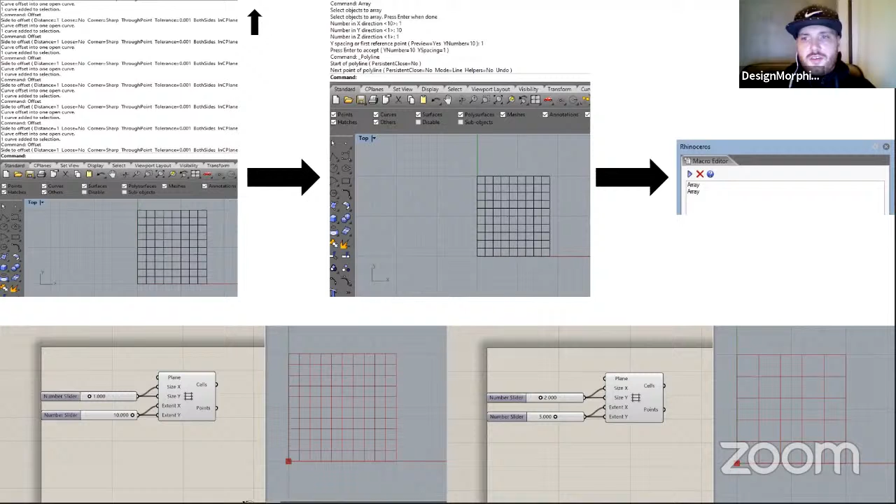Taking that onto the next level of tool building, where you're scripting and looping, you're taking those ideas, defining a square, drawing a line in U, offsetting it in V, repeating it in V, and then the same thing in the other direction, and then creating closed cells. If you can take that process, you can run it in a loop, and then you have your tool there, and you don't ever have to think about those steps again.

It's there, and you can use it. And the nice thing is when you're doing this is that it's also more flexible, so you can use this now. You can not just make a grid, but you can make a grid on a free-form surface, on whatever. So it also makes the tool, I think, more usable.

And if you take that to the extreme with something like Finch 3D, it's the same kind of idea, it's just a lot more input and variables. But if you break it down, it's really something like an extreme version of grids. So you're just creating boundaries, and the system is trying to figure out how that works, how that looks, how that lays out, what kind of space that makes, based on rules and standards and parameters.

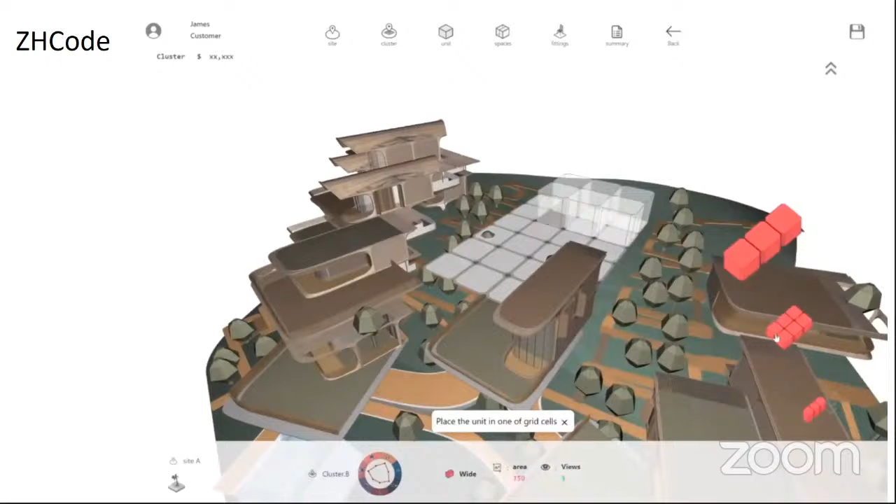And this is really important because clients, they don't necessarily understand things like building codes and required hallway widths and bathroom sizes. So it's kind of like they don't need to think about those things. They just need to know what they want. And then the system that you've developed or designed should figure that out for them. So you can get people involved in your process that don't even necessarily understand the process behind, because they don't necessarily need to understand that process.

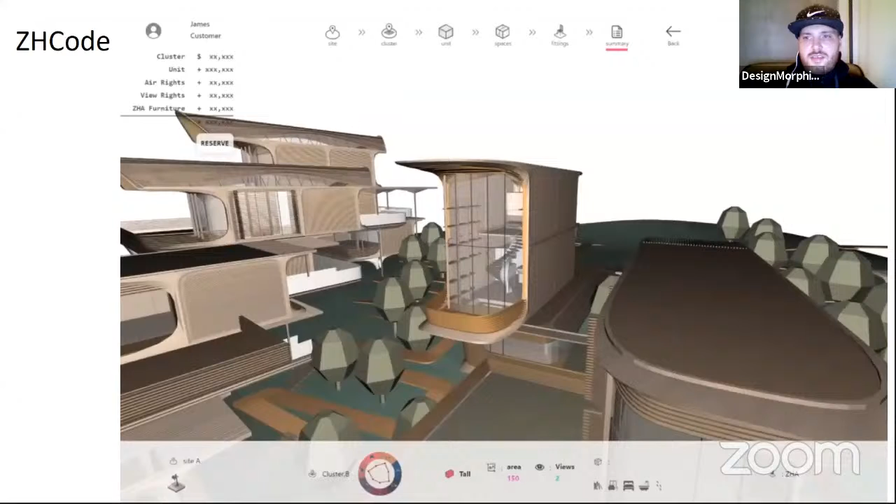And with these kind of things, a lot of the criticism would be like, well, isn't that kind of taking away from the job of the architect or the designer? But I would argue that we've already been doing that, just in a more manual way.

We all have books that are about standard references and floor plan references and CAD blocks and this and that, downloads from websites, like manufacturer websites for sofas or tables or whatever. So we're already and have been looking at these things.

So why, if they're standards and factual, why can't they just be embedded into the system so that you don't have to every time look through this chapter of this book to find this thing? So there's a lot of these things that are requirements or standards or suggestions. So I just think it's really an interesting way to get rid of those bottlenecks in the design process.

So which is kind of like an automation of design, where the designer is more a system builder and curator than a manual doer. So the benefits of automation, like to reduce obviously the redundant repetitive work, just to have time to focus on more important tasks. You can reduce human error in repeated operations.

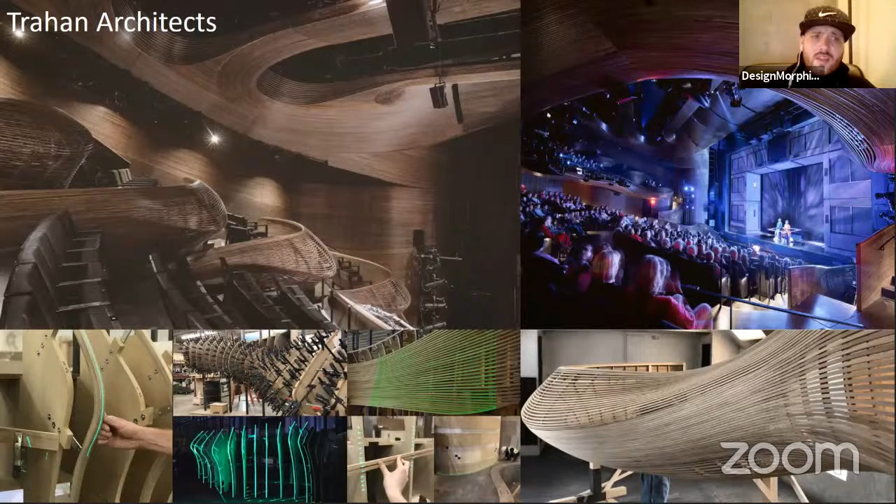And actually, the start of Pufferfish happened at Trahan Architects. When I joined, they were working on this theater in Atlanta. I think it was bought by or paid by Coca-Cola, so I think it's actually called the Coca-Cola Theater. But anyway, the entire interior was these steam bent wood strips that needed to perform acoustically.

So strips needed to be at different spacings between them for acoustic absorption panels, or different tightnesses so that sound can bounce off of them in certain ways to hit certain rows.

And it was all kind of laid in there and mapped by lasers and then bent and fixed into place there.

As you can see in this diagram here, in those mock-ups, how the spacing is changed. And the one on the right, the wood strips don't necessarily follow the exact curvature of the surfaces.

So this was how I created the kind of tween-the-curves-on-surface tool, which wasn't available in Rhino or Grasshopper yet, but was something we needed for this process. In the end, they were pretty far along with this when I joined, so a lot of it was done already. But it gave me inspiration to create this tool and use it for the rest of the process.

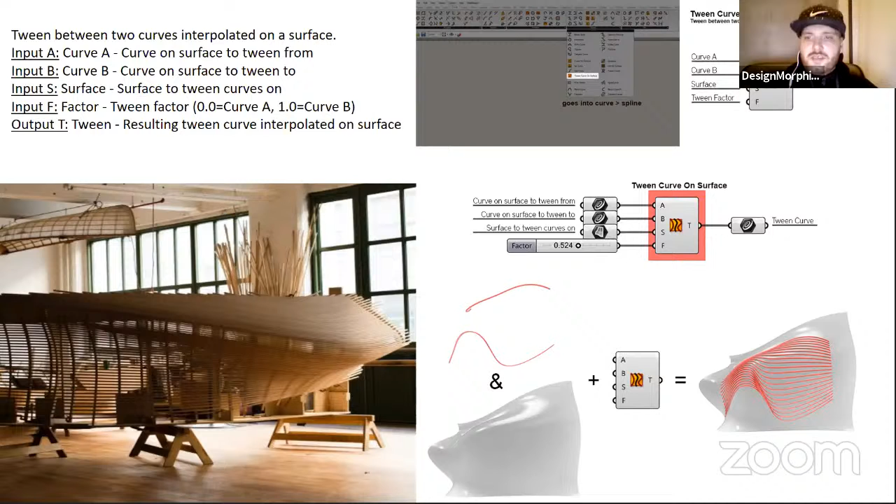And to do this process manually was kind of annoying and cumbersome. First, you had to have the 3D surface, and then you had to draw reference curves on the surface, and then you would have to unwrap that surface and the curves with it, then do the blending, because then you can blend without the 3D surface interfering with the directionality of those things.

And then you would have to map all that back to the 3D surface, which is simple enough for someone experienced with Rhino for one panel. But if you imagine an entire theater's worth of work that needs exact and certain kinds of continuity, it could be a pretty painful and redundant process.

So the idea was just to package that up so all that was happening behind the scenes was in code, and you just input the parameters needed. There were also a few different ways to do this, which is why there are 3 components. You could do it between 2 curves, or consecutively between curves, or through a bunch of curves.

Now, things like Grasshopper and other node-based editors are really good at finding these kind of use cases and packaging them into components or nodes, which we have a lot of already. But sometimes the software misses organic use cases, which is something I was also after.

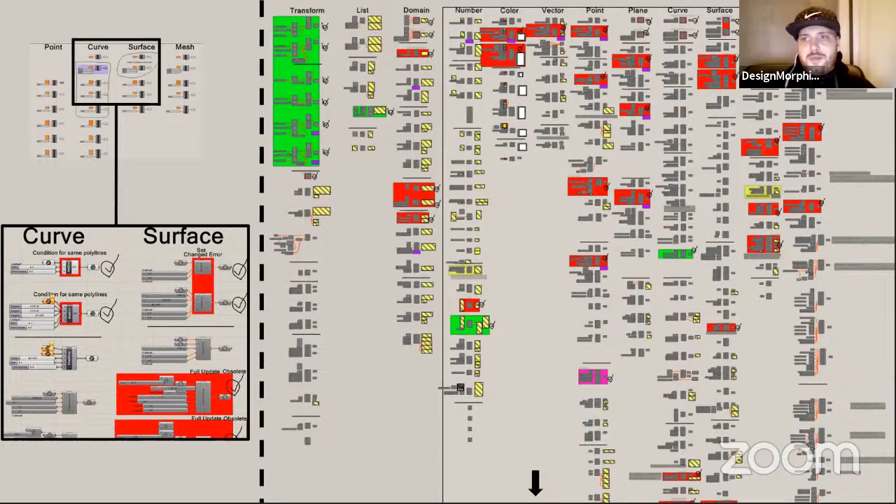For me, the best way is to, and I was doing this in Grasshopper, anytime you have an idea, or if you're working on a project and a process is taking too long, I just write it down. For me, writing it down meant making an empty Grasshopper component with the name of the thing, potential inputs, outputs, and a description. Then I would get to making the thing whenever I had the moment. Just to know there's a process that could be simpler, or something you don't want to do anymore - you get it there, document it, and then make it when you have time, or when you're a little more knowledgeable on how to make it. So that's what you're seeing here.

This is what one of the development files of Pufferfish looks like. It's kind of a mess at this point, but the stuff is there.

You don't even need to make such complex things to make an impact on the community, the people around you, or even yourself. There's a bunch of components in Grasshopper that aren't difficult, but in my opinion useful, like x-1 or x+1. You would think, why would you need that? But these are things that are so common in scripting and coding.

For instance, in loops when you're counting, or simple things like percentage - there's no percentage component in Grasshopper. I noticed that a lot of people don't actually know how to calculate percent, like tipping math, if you're tipping at a restaurant. A lot of people end up just Googling it. It's one of those things that's really easy, but a lot of people just don't remember exactly how to do it.

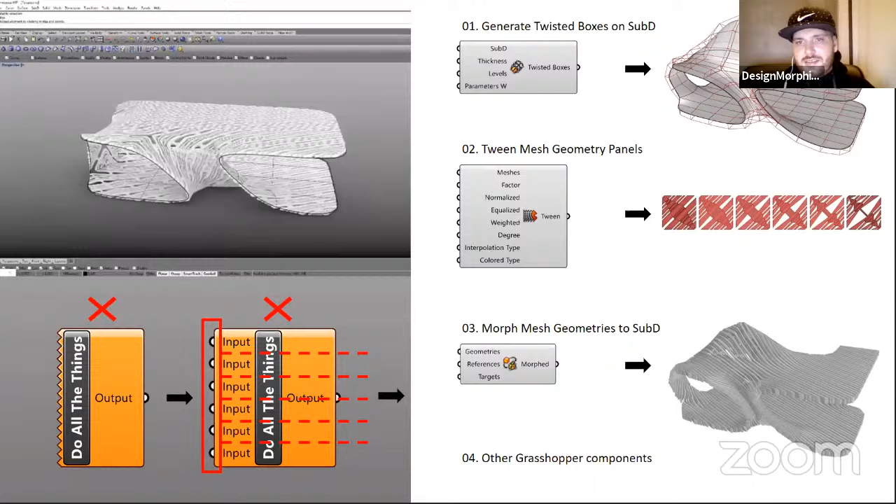You want to have different control over what is a panel, and then you want to have another control of actually performing that operation of panelizing. So there's kind of a line there of modularity. And then, of course, there are other Grasshopper components involved, depending on what you're trying to do. But the overall point is flexibility in the system.

And that's why, if you look at things like Ladybug, that component's entire use is in environmental analysis. But it's broken down, in my opinion, in a very smart and useful way that you can understand what things do, but also plug and play and only use the processes and things you need.

And the way that they break it down is there's geometry preparation, then analysis preparation, then simulation, and then visualization. That's the way they broke it up. And there's all these kinds of things depending on what you need, rather than it just being one whole thing that's like, okay, here's put in your geometry and output.

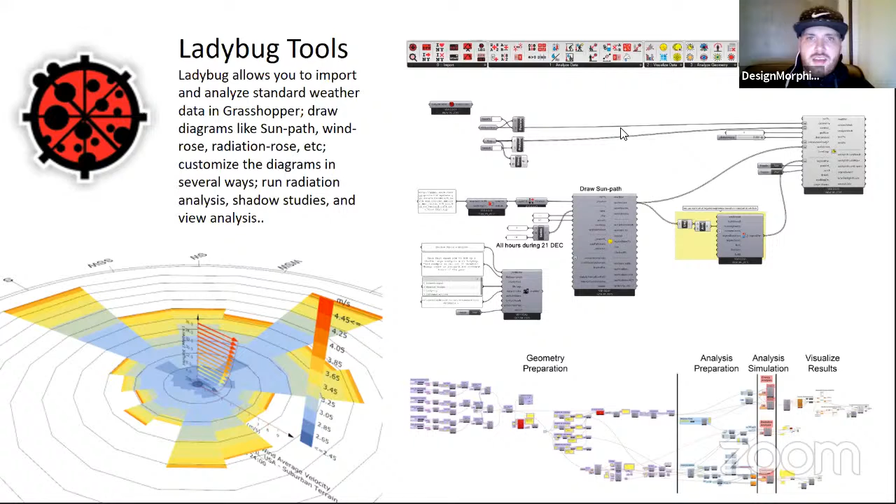Everything that has to do with analysis for that. And same with some stuff like BIM and Revit, where you're not just getting a building there, everything is put into components, right? There's walls and floors and ceilings and doors and schedules, but all these things kind of come together to make the overall final product, but they can be used and tweaked independently.

But you have to be careful, again, not to lock the user into one outcome. It's really important to give flexibility, as I'll keep reiterating.

But for instance, and this is just a funny example, in the example of Voronoi, it's not really the Voronoi diagram's fault. It just happens to look also interesting, but it's not actually made for that. It's for space planning and connectivity diagrams.

And because it looks so interesting, it often gets used incorrectly, for its aesthetic properties, which don't necessarily mean anything unless there is some kind of structural analysis behind some of them, but often it's just kind of pasted onto a facade.

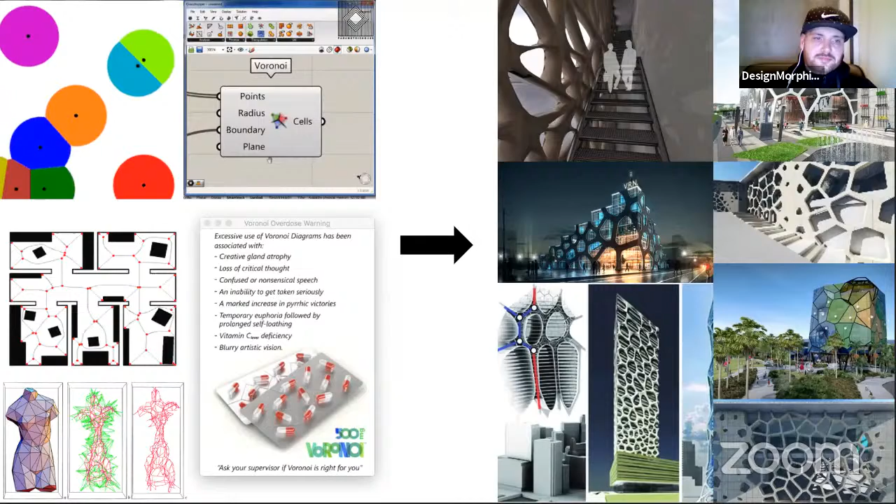But for this one, purposely, I didn't make any component that actually makes the flow of these things. So I left that up to the user. The user can draw this flow manually, or they can run it in a loop with some looping plugins, or they can just write a loop, really up to the user.

And then basically these two components transform whatever kind of flowy thing that they've made into this kind of discrete angled flow.

Another important thing to consider when you're making tools, especially if someone else is going to use them, is consistency across your tools. And I like to think of it as kind of a matrix.

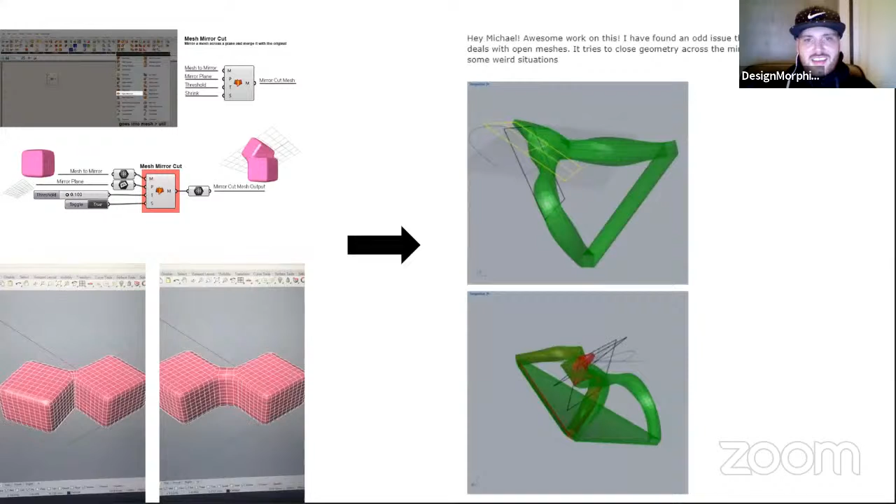As soon as I put it out there, a few hours later, someone sent me the screenshot on the right that it wasn't working on an open mesh. I had completely gotten so into these two cubes that I didn't even test it on open meshes, and it didn't work at all. That kind of thing really made me think, okay, I need to start testing things more. Then I went back, and you could see the component went from these 4 inputs to these many inputs. A lot of them can work just as default inputs, but it was working for all kinds of meshes and arrays. So I was pretty happy about that.

I would say it's pretty stable at this point.

Bringing me to a next level is the documentation of your tools. Apart from icons and descriptions, you want to make sure there's examples, whether through videos or files, so that people can follow and understand them.

Pufferfish has an example file for every single component, and also workflow examples, and they're all annotated and described and documented. I think this is also a big reason why a lot of people use it, is because they have that instruction manual there. It's less intimidating, I think.

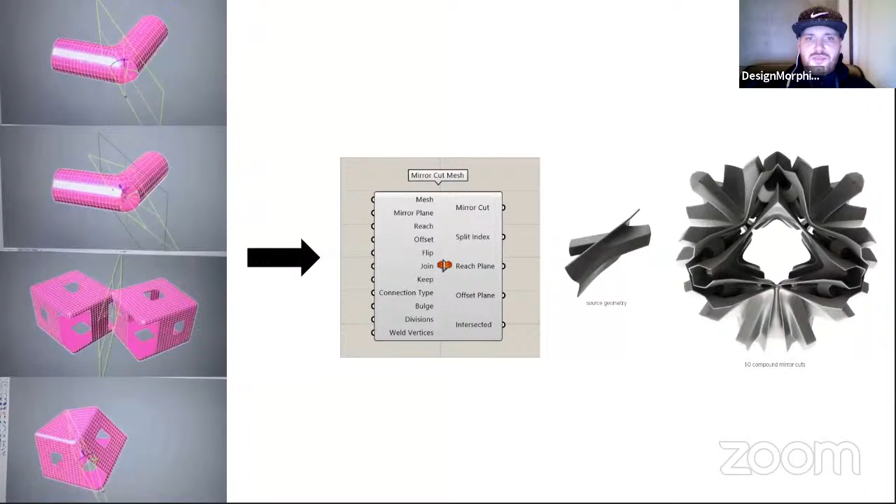When you see a component like this with no description and all those inputs and outputs, it can be pretty intimidating. But when you have instructions clearly telling you what's what and how it works, that intimidation just goes away, and you realize it's a lot easier to use than it looks.

Here's just some example stuff that you can do kind of out of the box with Pufferfish, and these are on the download page as well. Some of the kind of workflow examples.

It's really funny because there's so many examples that people were making some memes that I was tagged in on Instagram about the example files, which I thought was really, really funny.

Another really important part in this whole computational thing is to realize that none of us are doing anything new. We're just building upon other people's things and combining them in different ways. So it's really important to credit. The community is just too small to not do that. Make sure you credit the things you use, just as you would in an essay.

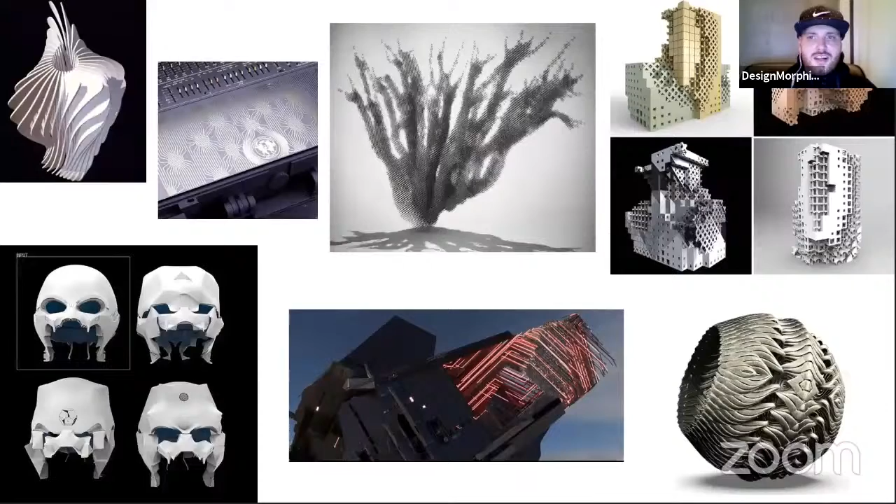Jewelry. The bottom left was someone's Burning Man - I think they were doing a VR Burning Man proposal.

Top left is actually a real wall texture, some abstract stuff. 3D printed jewelry, a lot of people are using it for. On the top left there, someone actually used it to make their tattoos, so I thought that was really cool.

In the bottom right, someone recreated a 3D printed outsole for footwear. On the top left, someone used it to make a real stone tiling system. People are using it on footwear, and the bottom right was, I believe, at IAAC - they were making some pavilion for one of their workshops using it.

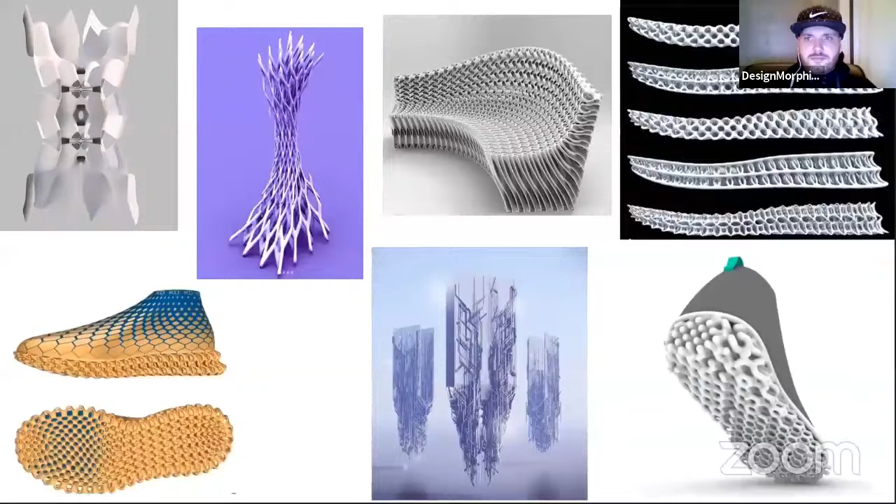So just a lot of stuff that's all over the place, which I found fascinating - all the different ways people found to use it.

One that I really liked - there's this one guy who was remaking all this architecture that we all know and admire, using Pufferfish. He remade all the facades and put them online for free - this one from Zaha, and the other one, and the DSR one. Really good detailed versions, not just faked - that DSR one looks pretty legit. I thought that was really cool, that he was remaking them with my components.

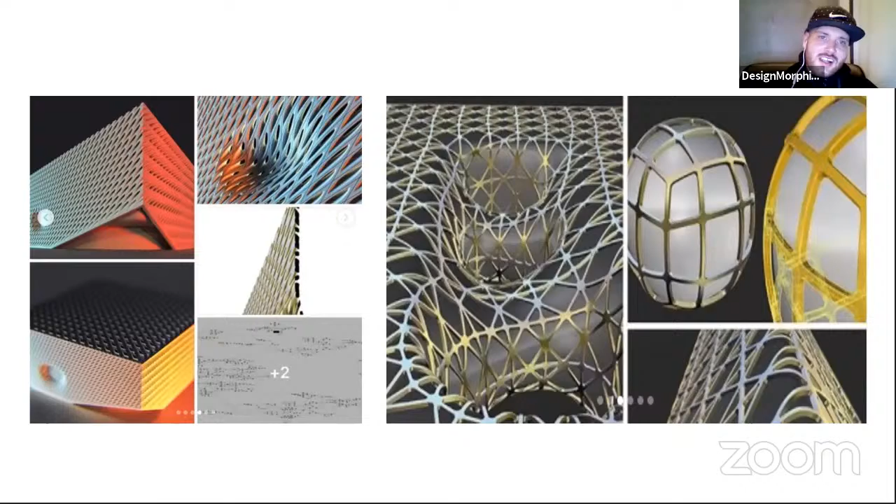And with DesignMorphine, in our workshops, both physical and digital, a lot of the workshops and webinars incorporate Pufferfish. Pufferfish obviously isn't the only thing making all this stuff, but it is a part of it. They're always using it, just because it makes some parts easier.

So these are just some examples - some are more obvious, like this one here, second from the left down. Some are more obvious where it is, or some are less obvious what exactly he was using. Again, more DesignMorphine and workshop stuff - there's some physical stuff here too, but more digital as well, just using Pufferfish in different ways.

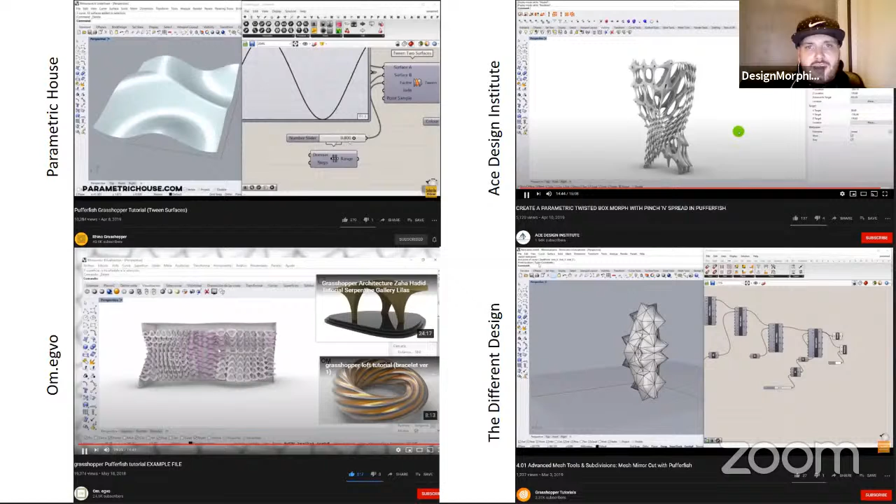At some point, other organizations started making tutorials for Pufferfish. That was cool because I didn't have to make them anymore, so that was really helpful. But it was also helpful for me to see how other people that teach with it would use it. Sometimes I'll see the tutorial and think, I didn't even know you could use it that way, even though I made it, because I just wasn't thinking to use it that way. Or sometimes I'll see them use it and I'll message them that actually you can do things easier if you do it this way. So it's just a lot of back and forth learning.

In my teaching, I like to work at this kind of scale. I find it a lot easier for teaching the tool because you don't have to worry about architecture, which is a lot more complex. You don't have to worry about the technicalities of stairs and facade complexity, and it's just a lot easier to learn the tool this way in a short amount of time. But it has a lot of the same principles that could potentially be brought over into architecture or something more complex in scale.

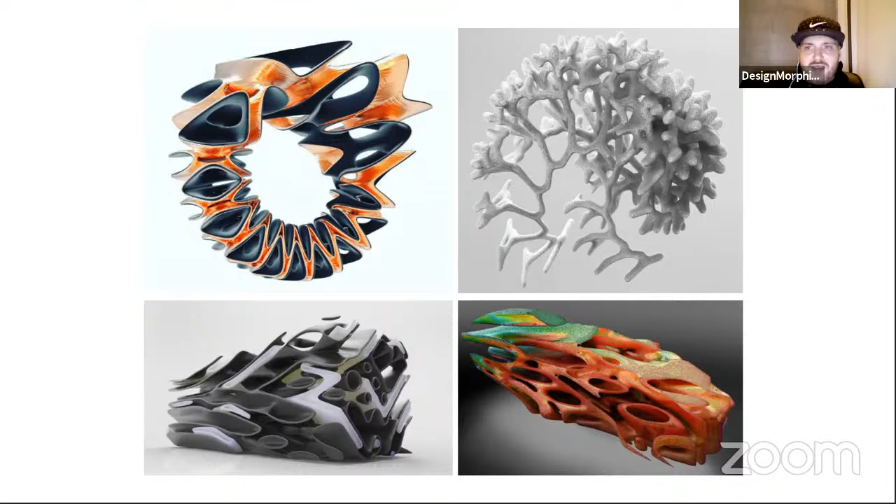If you follow me or are familiar with the work, I'm sure you've seen a lot of this kind of digital nonsense, but to me it's my helpful way of getting things out, more just like brainstorming and sketching. It's like digital sketching for me.

It's just really fun to learn a lot of different processes, because all these things just take different inputs, different processes, different combinations.

The first real thing that I used Pufferfish for was these crowns for a wedding - I guess they're called wedding crowns. They just go on your head during a wedding, and my wife and I wore these at our wedding, so that was really cool, that we just made them. They actually broke during travel, but luckily we were able to glue them together - they didn't break too bad.

More recently there was this lamp that we did in collaboration with Arturo Tedeschi, which was a really cool process because it involved a lot of different manual and digital things. It was a handmade Murano glass piece, so we had to estimate the shape, have them hand make it, and then scan it because it's handmade and has imperfections. Then we brought that scan into Rhino and designed the 3D printed part within that scan so it would fit - that 3D printed part is designed mostly with Pufferfish components and tools. Then we had to hollow the thing out and channel it properly for different lighting.

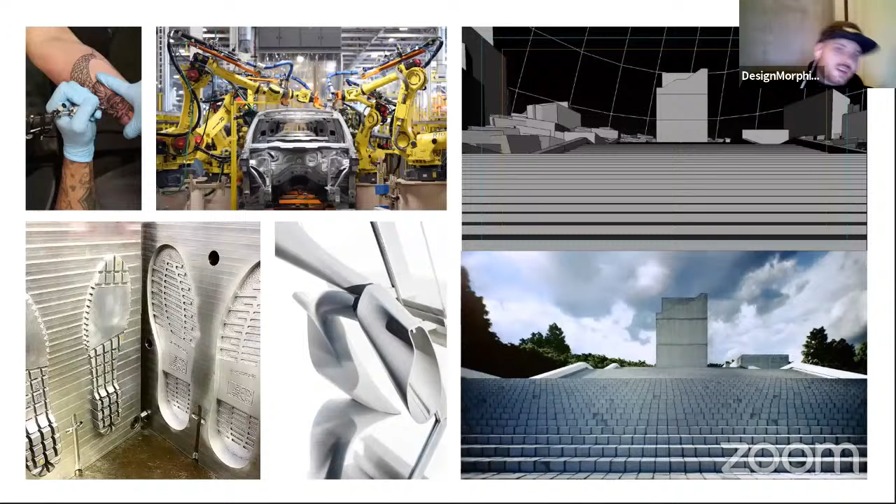So those are the limitations you should consider too. If it was something like a tattoo, you'd want to consider the thickness of a needle, or how detailed a human can actually draw, versus something made by robot arms, or sheet metal for a car. Or if it's for footwear, it's what kind of things can be injection molded and demolded. For a facade, you're looking at, depending on what it's made of — stone or metal — different types of limitations and methods of making.

Or if it's something digital, like a video game or a movie, then you're really looking at things like polygon counts, those kind of processor optimizations.

And at some points that can be consistent, and that's why my transition from architecture into product design, sneaker design, was pretty seamless. Going from Trahan Architects to Nike was such a huge scale change, but I never felt overwhelmed, like I had to do too much, because the tools and workflows were for the most part the same — the difference was the manufacturing.

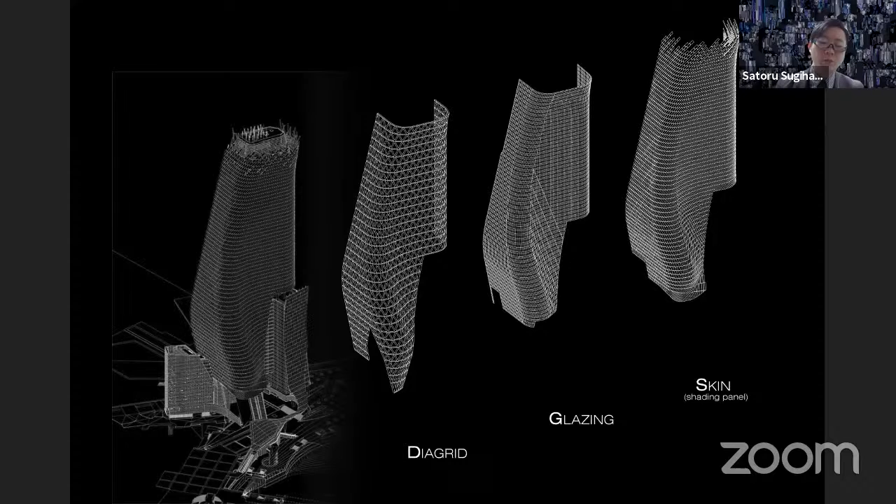So about the facade, as I mentioned, I mostly work in Processing, but the way of working or parametric thinking is all the same whether in Grasshopper, Revit, or any other platform.

I start with, in this project, a designer who designed the form together with Thom Mayne. I take that form and extract the surface of the building. Then I build a grid inside it, and then I put some geometry.

In this case, I create an internal orthogonal grid on the surface, then I put diagonal panels, then I put a pattern on it, which in this case is slightly rotating. That kind of process is actually a layering structure: you have the grid building part, the geometry allocation part, and the patterning part.

Once you set it up, you have tons of parameters inside it that you can change. You can swap the logic or insert new logic. In this case, the grid spacing is all different, and the geometry allocation is different too—not just diagonal, but diagonal panels in both directions.

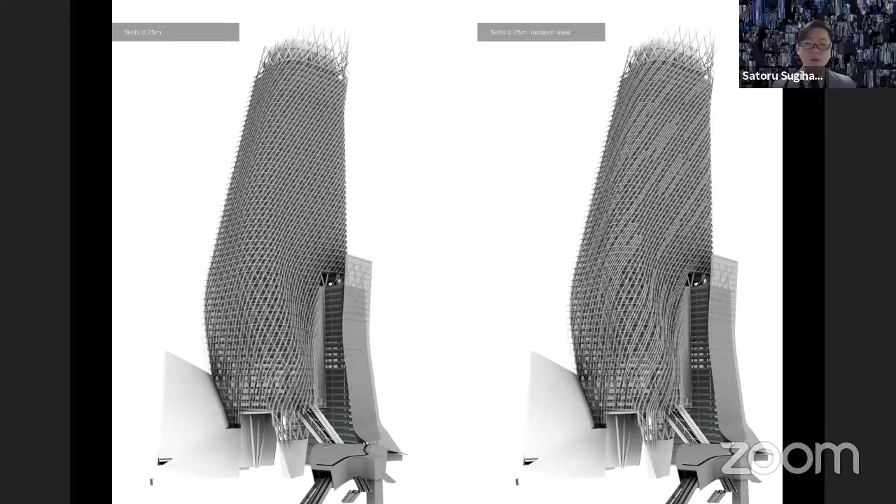You can insert some random algorithm into it, and control the randomness by other inputs, or specifically apply logic to continue a certain panel on the diagonal line, or use gradient randomness, etc. That process of building up algorithm, putting algorithm on top of algorithm, just keeps adding layers—extracting, exchanging, adjusting. That is the actual iteration of design, especially in my case.

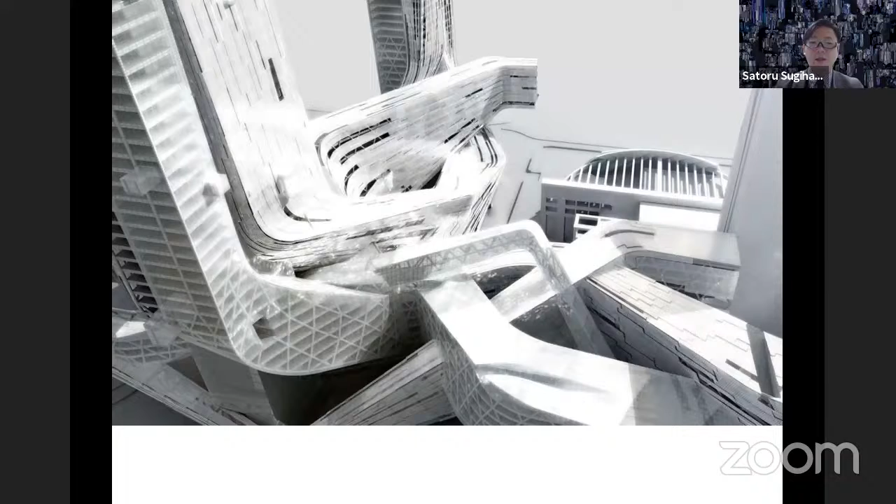That geometric technique I'm talking about is a very specific geometry generation technique I call striation, which is based on the internal grid of the building, running geometry along it either vertically on the surface, or horizontally or diagonally, and then differentiating them—controlling panel length randomly, offsetting randomly, or removing randomly.

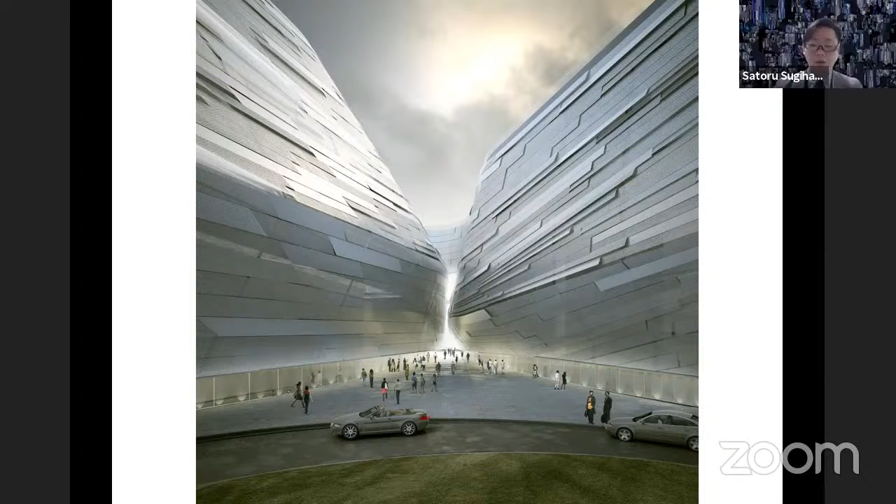So, with some pattern layer—in another case, panels are slightly tilted randomly to give a certain dynamic sense, and it was separated into different layers for different materials, etc. In this case, the panel size is kind of all the same. This is supposed to be a plastic membrane panel for a Middle Eastern project.

This is all photos by Morphosis, and this was a competition entry for the Kapsarc project in Riyadh, which we didn't win. Anyway, the primary purpose was to give solar shading, since it's harsh sunlight in Saudi Arabia, in Riyadh city. But we wanted to give a maximum view to outside, so it's very open horizontally and close to the solar direction, while still giving a certain cloudy sensibility with movement around the building shape.

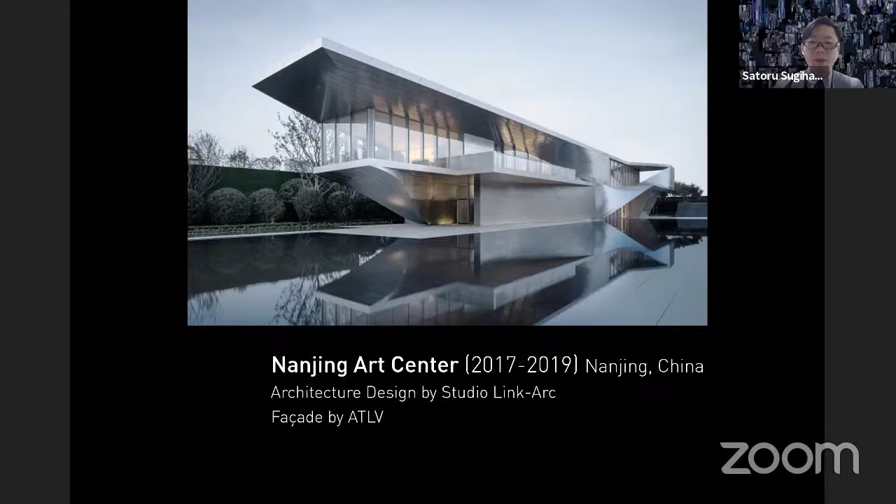Another project—the architect is Studio Link-Arc—is a gallery building in China, which started with a bunch of studies of panel style. So building the grid: grid size definition and panel shape definition, like a parallelogram panel versus rectangular panel versus triangular panel.

And then the grid could be randomized—some panels double height, some half, etc. That kind of logic can be applied or inserted while still playing with the diagonal panel, etc.

But we just keep generating tons of options, to see if there's any construction issue or cost issue, and of course the architect—where I work, the consultant, I work with architects, so they make the design decision, tying the whole geometric style to the design ethos. I generate a bunch of options together with geometric knowledge and construction knowledge, and at the end, in this case, a simpler one, but still tied with the whole building sensibility.

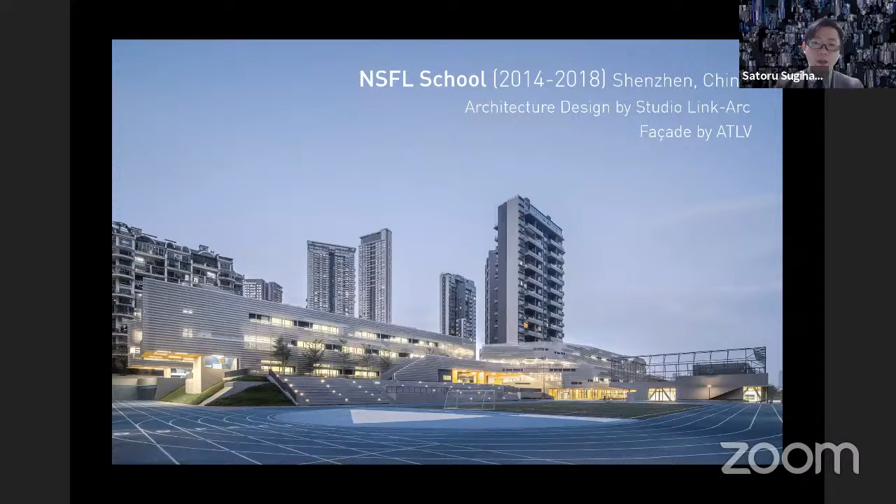And of course, cost is figured out as well. Similar type of project, this is an elementary school in Shenzhen by Studio Link-Arc. We start with a bunch of options.

In the beginning, I generate tons of different styles of design. But then as the project goes on, we limit the options and they tame down. In this case, toward the end, the grid really becomes an orthogonal grid with rectangular panels.

Although there are several different modules for the different profile and channeling profile, especially checking the corner condition where the building is straight vs. curved, we didn't want to, for cost purposes, unnecessarily complicate the project, so we didn't want to put three-dimensional panels around the corner. We wanted flat curvature panels and didn't want to segment it.

So in that case, we limited the extruded channeling panel only to the flat area, but we needed to test and make sure that could work for the whole building. Plus there's cost analysis and also optimization verification, checking which panels can be the exact same size, same type of panel. The curvature is most of the time special, but all other parts can be unitized into the same unit to make construction efficient. Anyway, that's the constructed building.

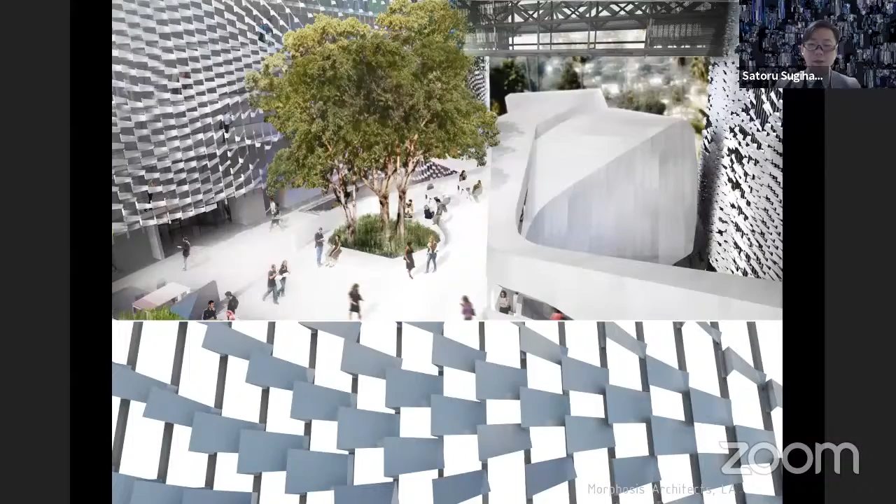I applied that technique to the Morphosis Emerson College Los Angeles project, in the courtyard facade. This building is a satellite campus university building - actually, this is easier to see.

This is actually a combination of school building - classroom, office, and dormitory - on both sides. This box-shaped part is a 10-story tall dormitory building. Both sides, the west side inside, this is the satellite campus of Emerson College.

Emerson College is based in Boston, on the East Coast, but their TV and movie department is very strong, so this building is for students to come to Hollywood and do internships in Hollywood studios during summer, and also take classes.

So it's a summer internship program satellite campus. Students live in this 10-story tall building, and occasionally take classes in the classroom located in the middle of the building. So the facade I built is actually a separation of the private dormitory space and the public classroom space.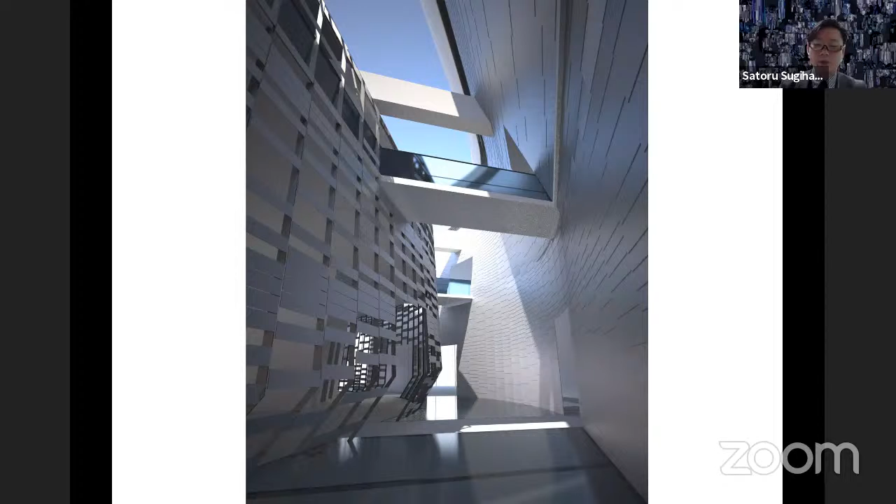Even if you have a fixed panel size, you can register the pattern by controlling the spacing between them. Or if you have to close everything, you can register the pattern by controlling the panel size or panel height, then express the whole pattern by the seam and density of seam of those panels. That was designed for the atrium in the middle building. Anyway, that's the second type of technique.

From here, I start talking about construction-related efficiency or geometric and mathematical issues. For this project, Emerson College, there are 1,500 panels on one side, so for both sides there's 3,000 panels. I tried to make it as smooth as possible.

However, the smoothest option is going to cost the most, because each panel would be different. This is typical in this kind of work, so I unitized them. Even though this looks smooth, it's unitized to 16 different panels, and half of them are flipped shapes.

So actually 8 different panels unfolded, and that unfolded shape fits together perfectly inside the sheet metal, aluminum sheet of 4x8 industrial standard.

To reach this point, we went through many iterations. First, we wanted to minimize the waste, that's one thing. Then, of course, we wanted to maintain the continuity to the maximum level or acceptable level.

Another thing is that this knowledge came only after we chose the fabricator. When we talked to them, they decided to use the water jet machine to cut these panels. The cost is determined by the minutes of use of that machine. That's the primary factor for the cost.

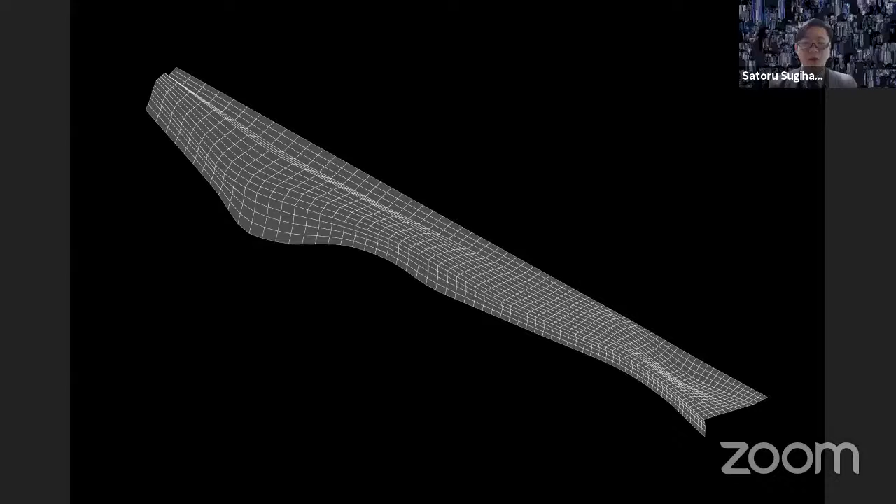But the problem is that each area is not rectangular, and not even trapezoid, because it's a twisted shape. The problem is that I have 36 panels designed, but I don't know which panels go where. Plus, I have options like slightly rotating or slightly shifting and offsetting, etc. So I wasn't sure, or it wasn't clear, which panel should fit best where.

For the solution to this issue, the approach is to simply check them all.

So with 36 panels, with a 1 millimeter increment of shifting and 0.1 degree of rotation, there's less than 1,000 different options for each. For a computer, checking 1,000 options is no problem. I made this animation just to present it, but in reality this computation is done within a second or less. So I just ran a full search algorithm to find the best panel fitting without colliding with each other.

Basically what happened is project area maximization. So I allocated which panel goes where, and on top of that a graphic designer worked on all the texture. There's a graphic film applied on top of the folded aluminum panel, and this is like a sports theme slash fashion theme, for a sports bar slash restaurant. That's how it came out.

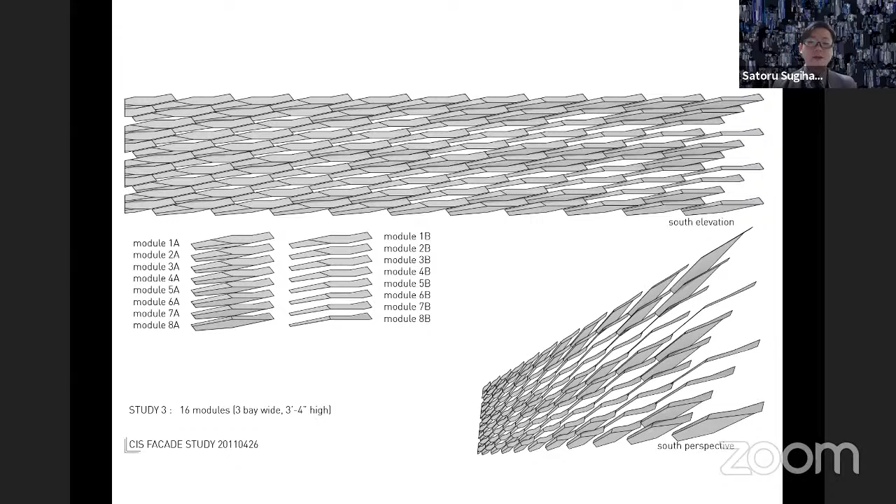Next project, in this case the facade was flat, and I needed to put the solar shading panel outside the glass panel. I was specifically interested in creating a kind of ground-figure condition, like an opening also looks like a figure, but the panel is also a figure, so it blurs the opening and the closed part together to unite and hold the face of the building aesthetically.

This project also had a limited budget, so I limited myself to using less than 10 different modules. I went through a bunch of options and studies, and at the end I had 10 different panel modules to cover the whole building.

This was for the Morphosis project of Bill Gates Hall at Cornell University. You can see the transition from a flat panel to more open, fish-scale like or dragon-skin like panels. That dynamic sense was something I was aiming for.

This is one photo showing the panels and also the reflection panel. The glass panel is super reflective glass. So you see the front of the facade panel, you see the glass, you see the back side of the panel, and you see the sky reflected, etc. There's tons of visual or optical layers there as well. That's the design process of this Cornell Bill Gates Hall facade.

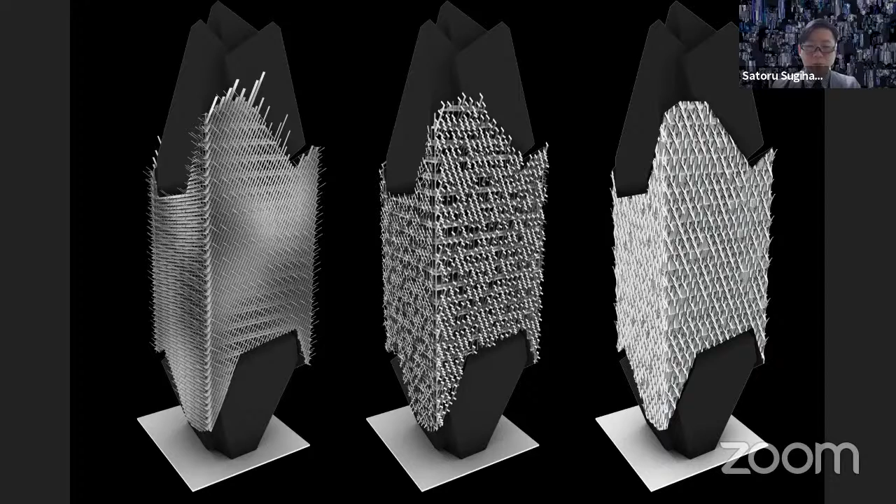Another type, this is also a modular approach. This is a finance city tower in Morocco, completed last year. In this case we wanted to keep the facade simple, so we kept everything modular to a certain level. First thing is we needed a solar shading, actually a louver. We wanted a louver in Morocco.

We also wanted to double down on the aesthetics of this crystalline-like building shape, a sense of not really rock, but crystal. So we went towards a more solid sensibility, but still functional louver, with this kind of crystalline geometry, diagonal cut, or diamond cut. We went with this diagonal louver, almost vertical but diagonal, with some solid accents. That's the completed photo. We made it like a really solid, stone-like louver system.

Another project, this is a residential house in Singapore by other architects. After they designed the house, they asked me to cover the whole house with perforated metal. They knew they wanted to register a certain tree pattern, but they hadn't done the full exploration or iteration process, or decided what tool to use, or how to generate the digital fabrication information to produce it. Actually this is not really digital fabrication, it's traditional perforated metal maker's fabrication, so we needed to generate a drawing for that.

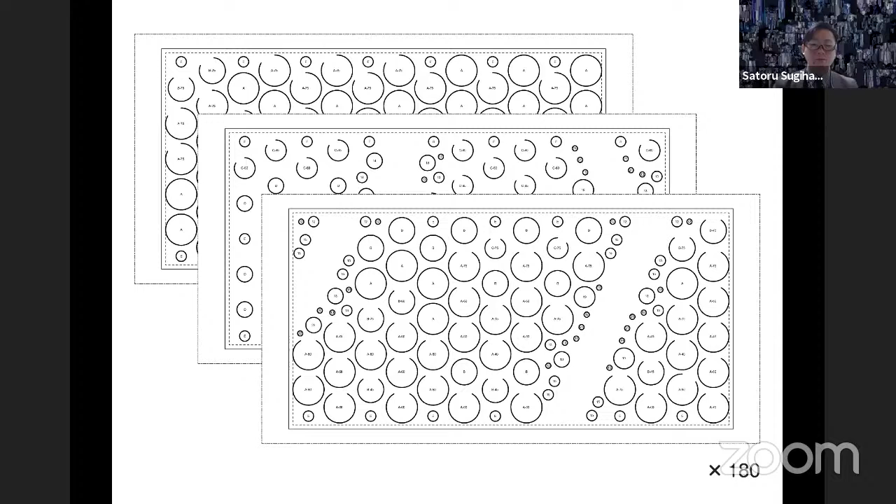I put the whole thing into Processing, and this - it's actually kind of long code - generates the whole 3D shape, the geometry in Rhino, and also line drawings. First it generates the whole building line drawing as 2D, then each chunk is converted into a DWG file. At the end I got 180 sheets of drawing automatically, which was sent to the fabricator so they could produce the panels. That's how it works.

One more project - actually several more, but more projects. This one is the Istanbul City Museum, still under construction. The architect is Salon Architects in Turkey, and I worked with them - first I explored all kinds of modernized Middle Eastern arabesque patterns.

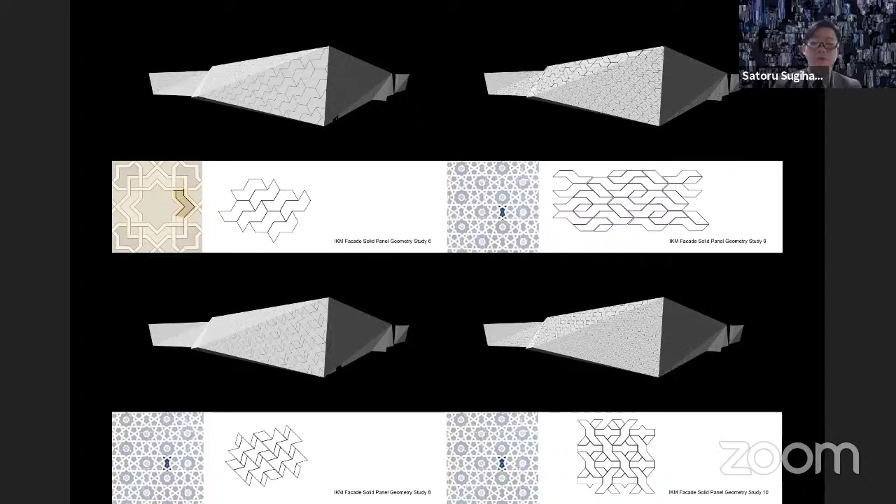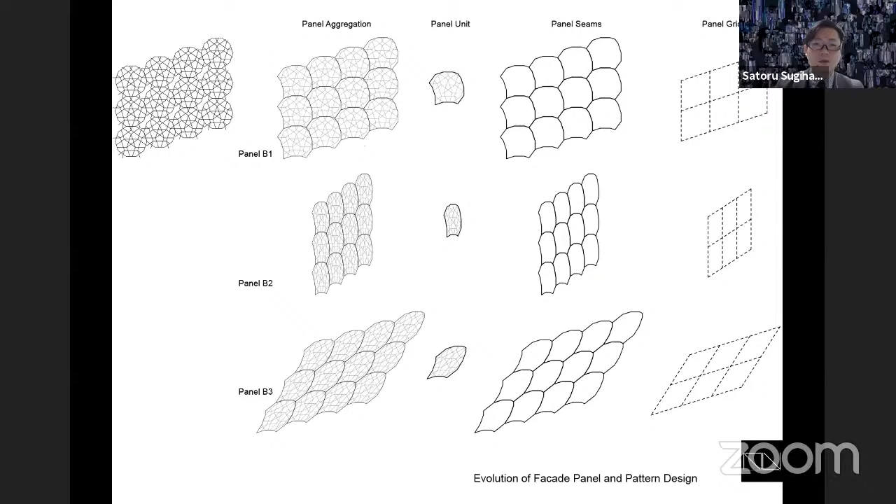That was the first round, but in the second round we picked certain patterns - one circular arabesque pattern and another more hexagonal one. Each had an option to transform shape. First, that was for the grid definition of the facade pattern to match the building shape. More importantly, we also thought about the construction grid and how efficiently we could pick up those panels - that kind of iteration and study went through.

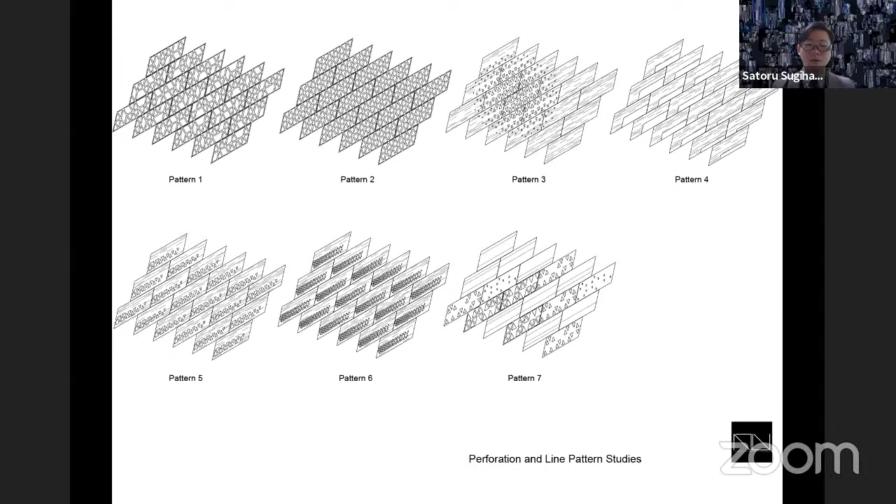At the end, to match more with the building shape, we went with the parallelogram shape for all the perforation studies and pattern studies. In the end it came up, although really subtly - that's the final option, and it's under construction now. This photo is from 1 or 2 years ago, so it should be much further along now.

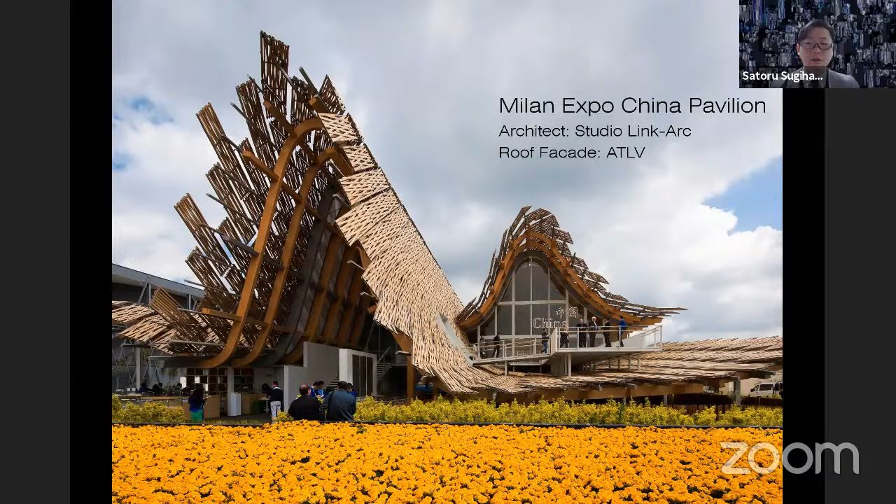Another project - Milan Expo China Pavilion, by Studio Link-Arc. That was Milan Expo 2015. I designed the roof facade - actually it's a roof, but it looks like a facade. It's a diagonal panel roof facade, actually a woven bamboo panel on top of a metal frame. This is built in Milan, Italy, but it's a Chinese pavilion, so they used Chinese bamboo to build the roof.

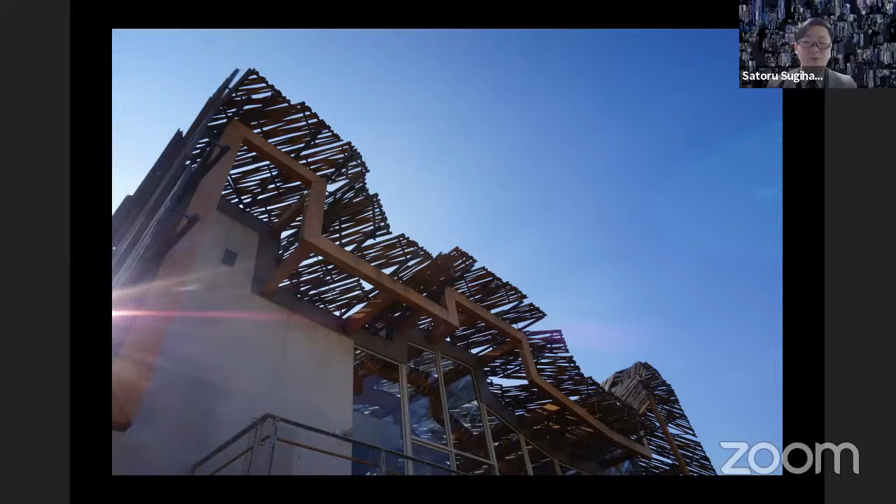The form of the building came from the idea of a Chinese landscape and also Chinese urban scale, so quite a complex shape. Translating that complex shape into a buildable shape was a whole other aspect of the work I did, which I'll talk about after some other project. That's the back of the building, which represents the cityscape of China.

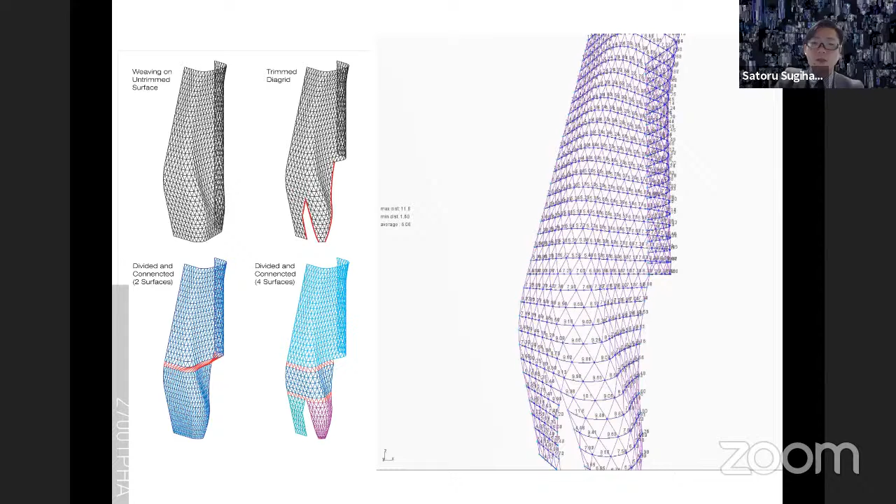Technique-wise, those are the stuff I was showing. The facade is a kind of geometric technique, but this is more algorithmic, a different type of approach using dynamics, which these days you can easily do with Kangaroo. For example, the diagrid building in that complex shape sometimes cannot be done in the traditional way, so you have to use this kind of technique to make it smooth.

The Emerson College project also, at the final phase, I used force simulation to control the pattern.

You can easily do minimal surface stuff, which I used for some competition lobby design. Form findings are a very common thing to do with this technique. You just define a connection point or the tensions, strength, etc., then run the script to generate a form.

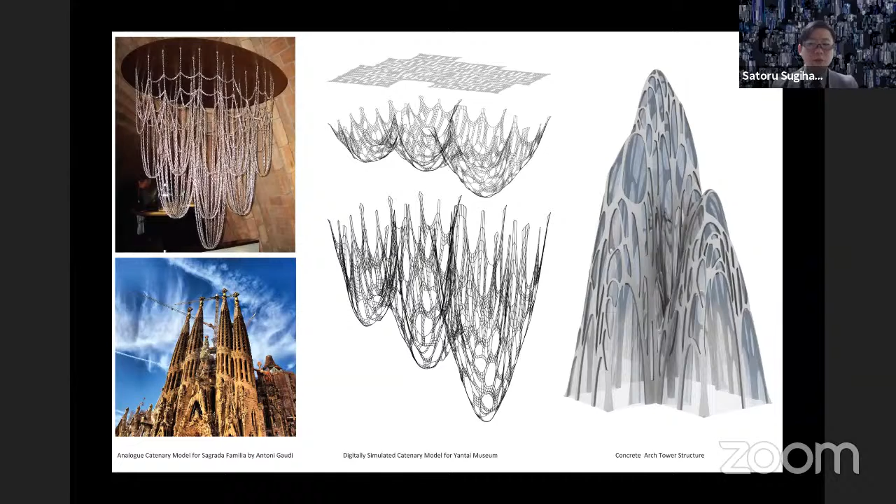But that's not a new thing to do. It's not that different from what Gaudi did—we're just doing it digitally. So, still doing that. Then the other aspect is the rationalization, which is really about construction.

When you have maximal smoothness, most of the time that's the most expensive option, so you have to maximize the repetition of certain elements to make it rational and cost efficient. That process happened in the case of the facade, and there were some issues—not legal, but many factors—why it happened this way.

The one thing is, when you decide where to repeat, that part is not necessarily an automatic process—you use your geometric and mathematical knowledge to do that. But what's automated is the gray area between. This stitching is automatically done by the physical simulation I just showed. I just decide where to place the same panel, then my script automatically stitches them together to make it look all smooth, removing the seams between them.

For glazing division, in the beginning this Fair Tower project just had a projected diagrid pattern to have flat panels, but that had a problem generating two tiny sharp triangles, which was an issue. If the glass panel is too sharp or too narrow, you cannot produce it because it will break.

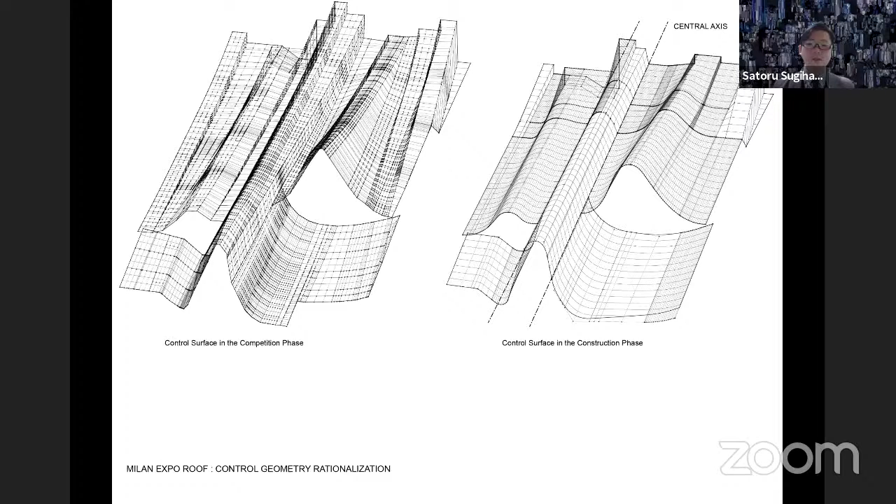Making it rational is the first step. It's a super simple thing to do—just try to maximize the amount of straight lines, then try to maximize flat surfaces, and if not flat, conical or cylindrical surfaces. That's the process.

And then to build a facade or some panels on it, first you would build a perfect grid and the perfect panel with no gap, or zero tolerance. But after that zero tolerance or unique shape panel, then you unitize them.

You approximate a slightly bent panel to a totally flat one, or a very bent panel to just one single folding, etc. So you have certain tolerance to do that, and certain target to achieve. In that way you can make the whole facade system efficient.

Even the joint is a problem, and usually the joint issue and the facade panel are kind of tied together. There's a trade-off relationship. If you make the facade panel super efficient, then the joint becomes unique. If the building is a unique shape and you make the joint super rational, then the panel is not rational. So you just need to find the best balance.

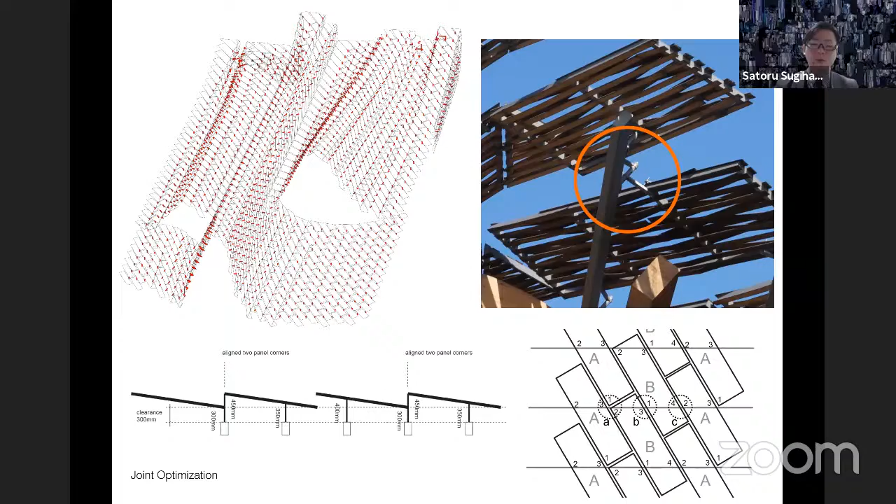If you want to achieve a super smooth, continuous, beautiful thing, it costs a lot. And if you want to really simplify them, unitize them, and segment them, it's not ugly, but it's just a defined look, not a smooth thing.

What you need to do as a designer or architect is find the range, and present it to the stakeholder - the client - who can decide how much money they can put in to achieve what quality. So as an architect or computational designer, I just generate those options and explain how it works.

Then quickly, another topic of rational quality: optimization of solar performance. In this case, Fair Tower has an algorithm for each panel to optimize itself by checking the location of the sun in front of the panel. Because each panel is oriented in a different direction, the panel on the south is optimized for the sun at noon, the panel on the west side is optimized for the afternoon, and the east side is optimized for the morning. This is just a result of one algorithm for the panel to find the location of the sun to optimize for.

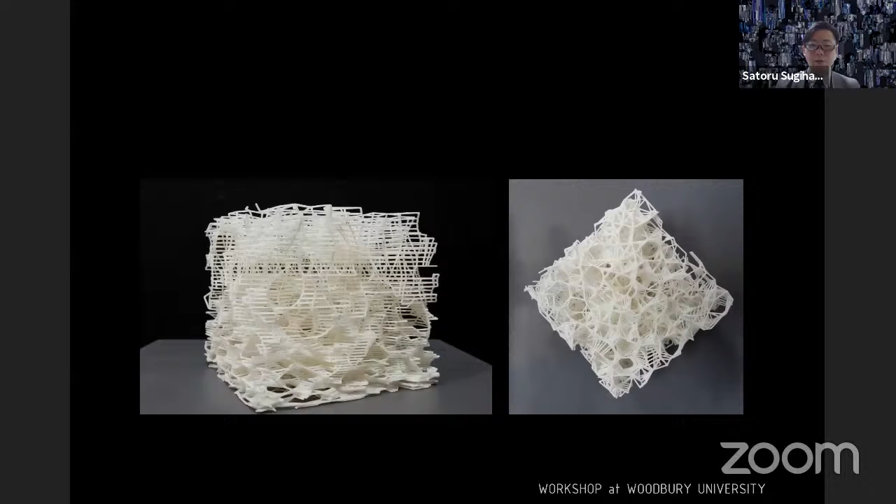Some of them are more for swarm simulation, and some other geometric operations. This one is a swarm generator for 3D prints. This other one is just a two-dimensional use of a swarm for some graphical pattern. But let me skip through this part, not that important.

Some branching algorithm trying to generate a structure, using that for a competition with KUD and another one. That was a competition for a convention center in China on a site where it was already built, so we lost the competition.

Another thing: Grasshopper Python. I was also teaching a Grasshopper Python course in SciArc, specifically using a subdivision algorithm. I asked students to write custom subdivisions, and there's that type of work.

I'm also interested in complexity, a certain specific type of complexity - I think this is Daniel and Alejandro's work. These are complex geometries. First of all, I ask students to run a script right before the computer crashes, so you just try to reach a limit.

But one specific thing I asked the students to do was try to find the quality of complexity which doesn't go all the way to chaos, but still has certain harmony - or not necessarily harmony, more like a kind of homogeneity or certain consistency - while still being super complex.

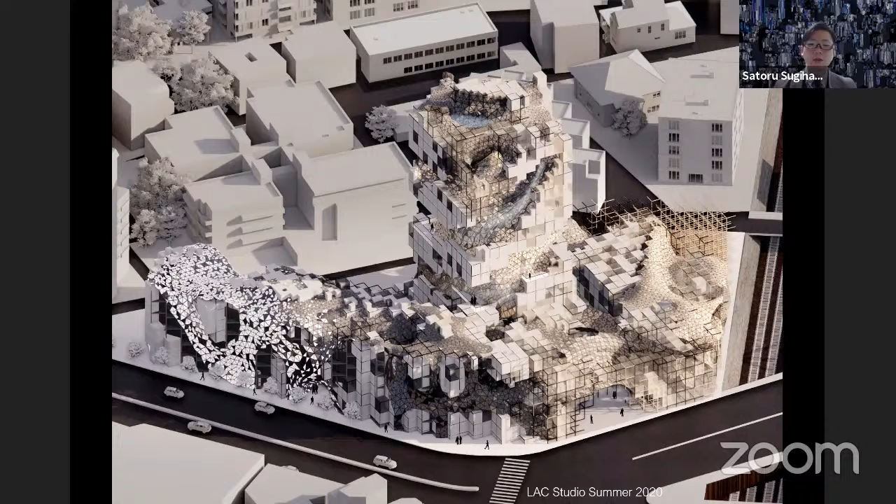Following the same line of interest, I continued into studio teaching. I taught a studio course in China this summer on urban context, with the same kind of approach. I asked students to pick a certain urban context, trace and extract its complexity, actually generate complexity, but still tie it to the context, and find a type of architecture or urban formation that has complexity with differentiated quality and homogeneity, or consistent quality, at the same time. That's what I pursued.

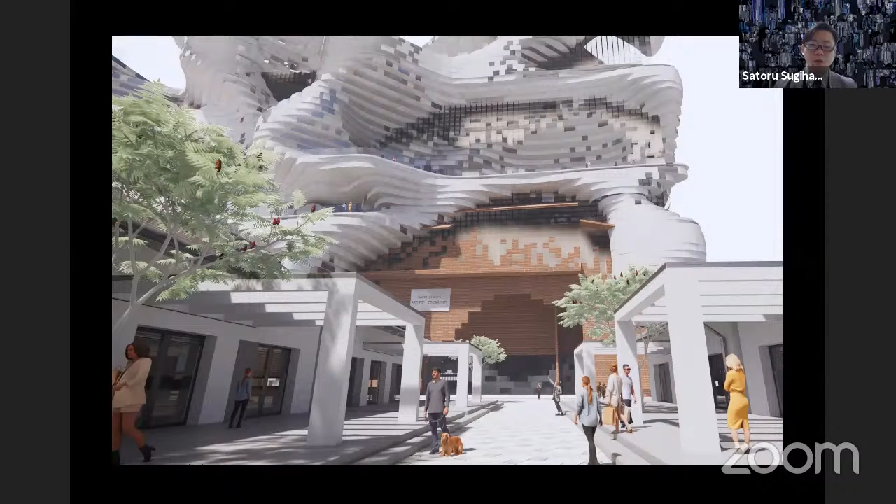Then, going back more to agents - another thing besides complexity aesthetics I'm very interested in is the agent approach, which originally came from nature. The agent approach comes from complex system science in the 1970s.

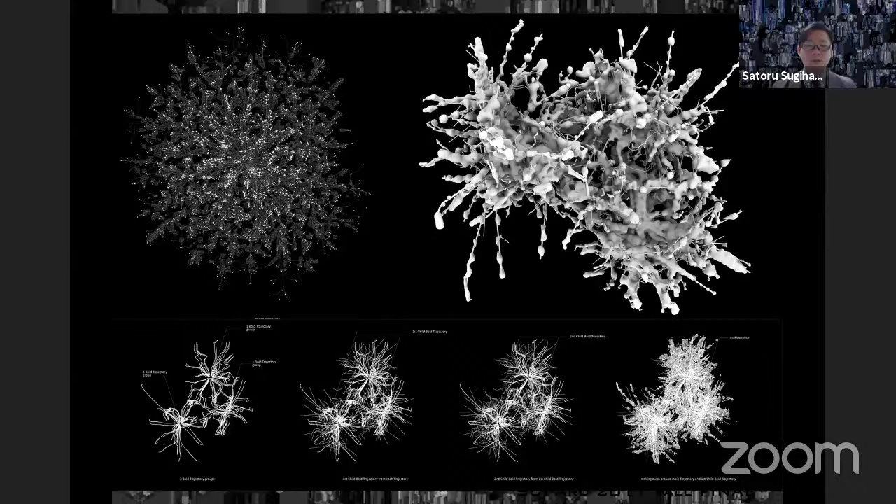I asked students to find examples from nature to explore the mechanism of how it's built. In this case, students wrote code to simulate mushroom growth and modeled something abstract out of it. Another student looked into bacterial growth to generate a certain type of formation geometry - things you can do easily in Processing, together with my library.

Then I asked myself what I could do with this for architecture - maybe something physical at least. I challenged myself to build something like it, an installation I did in Los Angeles. But one thing is I cannot just generate whatever line or trajectory form - it wouldn't stay as a structure. So to make it stay as a structure, somebody needed to make it structural, which I did with a structure agent.

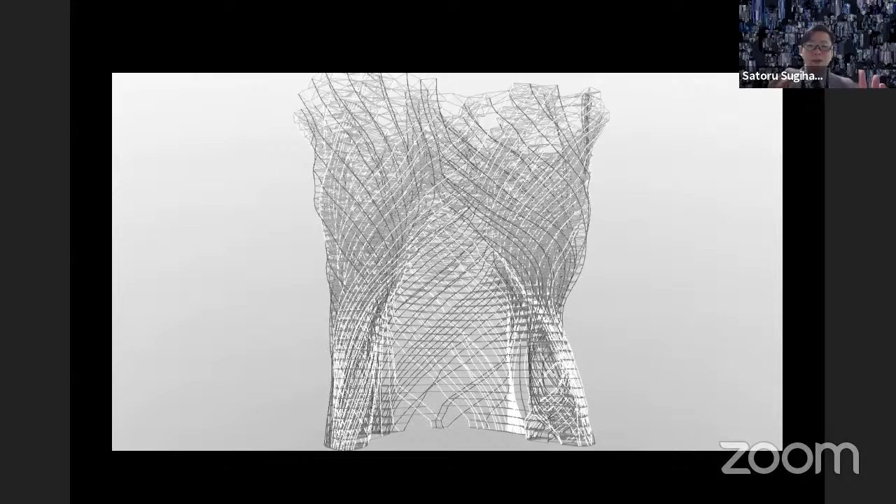So there are two sets, actually several agents. One is the swarm agent, which is currently flying around in this plan view. But there's also the structure agent which is left behind the swarm - all the vertical, diagonal, and horizontal lines are structure agents. The vertical one is a tension optimization agent, and the horizontal one is a compressive structure agent. They try to find a state of equilibrium, and when they reach a stable state, that's the geometry you can build. That's how this self-optimization works.

I applied the same logic to other projects, like designing a pier. This one is just an imaginary project - I generated the swarm formation first, then did physics or structure simulation and optimization second to make it work as a pier structure. It's a suspended pier structure - of course it's super expressive and not necessarily structurally efficient, but the whole thing is complex while still working as a structure.

That's a pier in the London Thames, having a park on the river, using wire as a kind of tension structure, while the colorful ribbon is a shading device. So that's one design project, and occasionally I look into other types of algorithms.

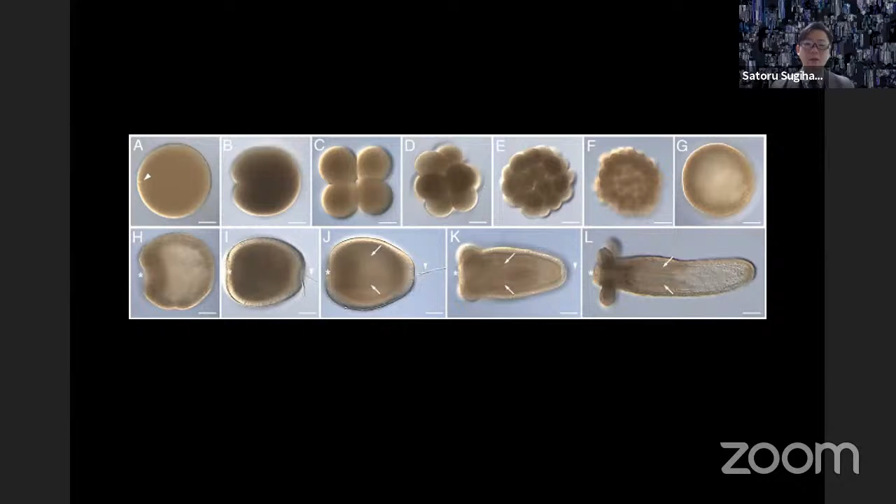In this case, a cell growth algorithm - let me just show you the architecture project at the end. I went through a bunch of algorithm development and mechanisms, parameters, and switch controls. What happened was I developed my own algorithm for several months.

But later I met some other architects who were doing similar things at the time, and we worked on an interior design project together. In this case, I designed this light diffuser, a sculpturized kind of structure fixture, in China.

So the overall project is with collaborating architects who also developed their own cell growth algorithm, and we worked together to realize that. So in this case, that whole strip is what this shape is generated out of from this cell growth, and it grew from a simpler initial shape to this shape with a certain differentiation of the panel shape. That's a reflection of the construction process, and also an expression of that.

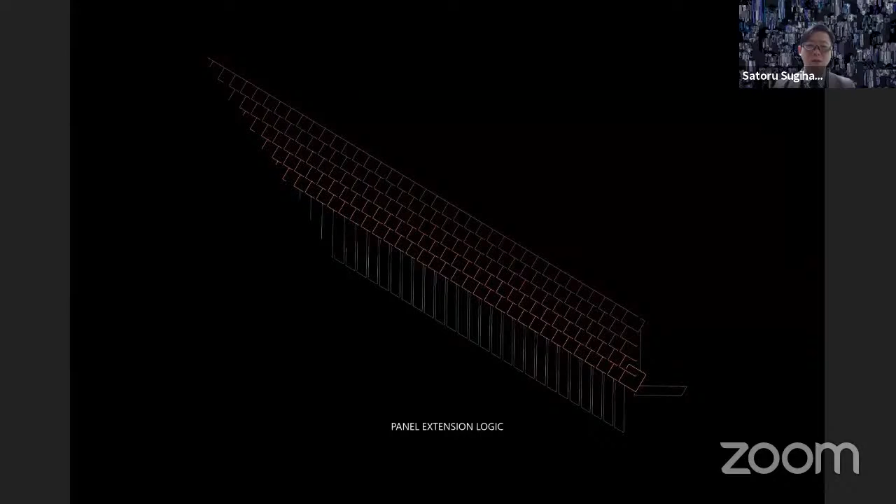This is a specific algorithm I've been developing for several years, which is about modularity. It has control that's a bit different - it has a quality that's nature-like, creature-like, or tree-like, but also more artifact-like, tile-like, block-like. That's the point of this algorithm. It can go back and forth because of a certain hierarchy in it. This is all about the hierarchy of behavior of the agent, which is the main point of this algorithm. Using that, the students built or generated those geometric formations.

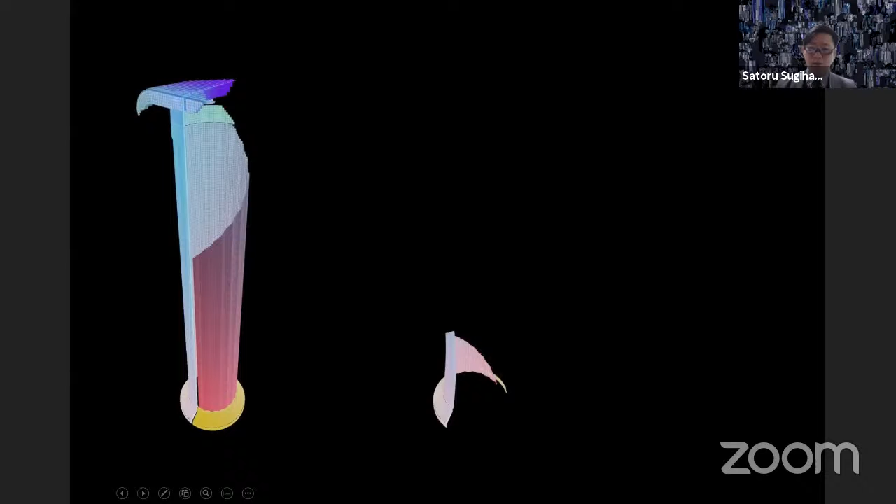But anyway, that's a type of work, actually more research work. My main work is still building or designing facades - that's the main part of my practice, but this is my research interest. That's the kind of new thing I'm trying these days. And that's all of my presentation. Thank you very much.

Thank you so much, Satoru. It's amazing, everything. We're still delighted, not just for the classes, but seeing all this again. I don't know if there are some questions from the students, or professors.

I'd like to know how do you take on a project? What's the first thing you have to think about, and what are the ideas? How do you make these ideas concrete?

In the case of facade design, which is most of the work I actually do, I have to really talk with the architect about the design intent and premise, and sometimes there's an idea about material or a sensibility they want to express. But the first line is the most exciting part, where I have the most freedom. Most of the time I work within constraints, meaning I have to use only flat panels, or only cast cement geometry, etc. But within that, I explore as much as possible.

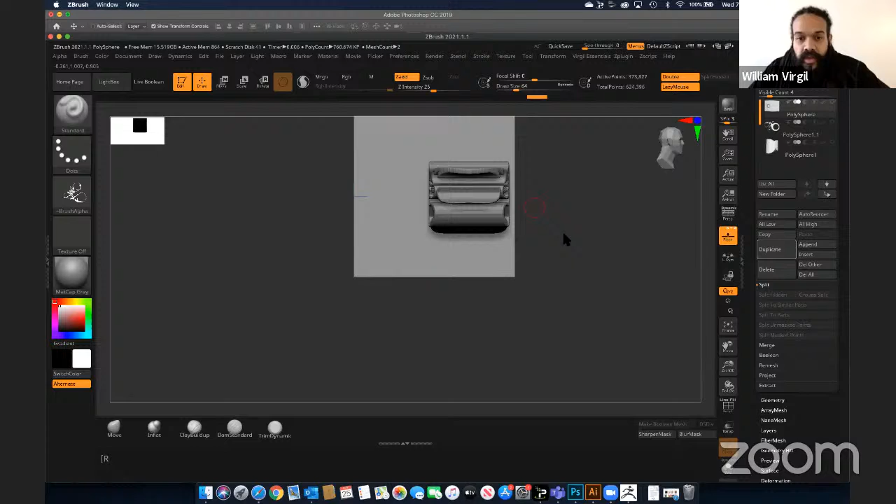Regreso aquí arriba y sigo probando diferentes maneras de dibujar. So, aquí voy a hacer otro círculo. So, eso ya me cambia el contorno de la manera que esto se ve. Voy a dibujar otro de este lado para que me haga un hoyo. Bueno, me lo hace un poquito más pequeño. So, esto también me parece que más o menos puede funcionar.

Déjame simplemente, ve cómo me lo cortó aquí. Entonces lo voy a tratar de hacer un poquito más sólido ahí. ¿Ves? Y así pueden ir dibujando.

Entonces, eso es lo que me gusta de trabajar de esta manera, de que puedes ir, o sea, si tú te lo imaginas y lo puedes dibujar, puedes simplemente traerlo a ZBrush como una imagen y comenzar a crear. No solamente tienes que, puedes utilizar varios alfas a la misma vez.

Aquí puedes importar otros, o en este caso voy a importar, a ver, entonces aquí puedo, ok, so ese lo voy a dejar así, solo voy a duplicar, voy a geometría, apago el shadow box para que me quede ese pedazo de geometría, después regreso aquí, quito la máscara, regreso y ahora voy a pintar y sigo escogiendo.

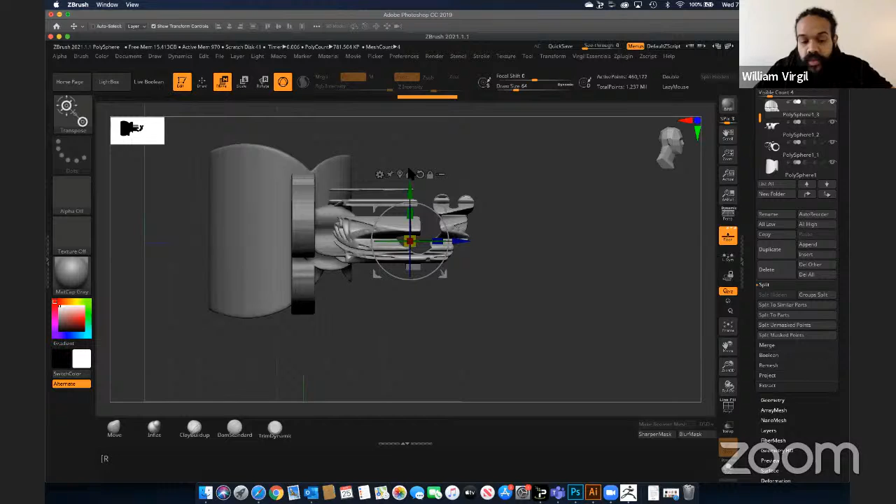Entonces puedes prenderlas todas, ¿verdad? Y puedes comenzar a organizarlas de manera diferente, de acuerdo a cómo sea tu proyecto, lo que sea que estés haciendo. En este caso puedo más o menos mover esto aquí. Para traer el gizmo simplemente presionas W, o puedes presionar la E o la R.

Entonces, como en Rhino, aquí puedes manipularlo, moverlo. Aquí puedes expandirlo o hacerle stretch de esa manera. Nunca lo haría de esa manera, siempre lo haría uniforme en el medio, así. Y aquí puedes rotar, ¿verdad?

Entonces, después que generas diferentes tipos de geometría, ya está en ti como diseñador cómo organizarlas de una manera que la geometría pueda trabajar para lo que tu proyecto necesita. No sé, si estás tratando de hacer algún tipo de edificación, ya está en ustedes cómo decidan usar la geometría que generan.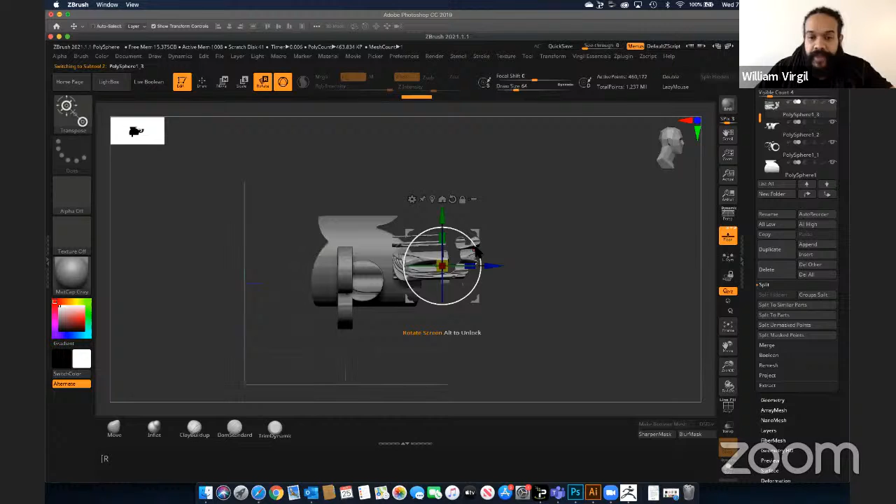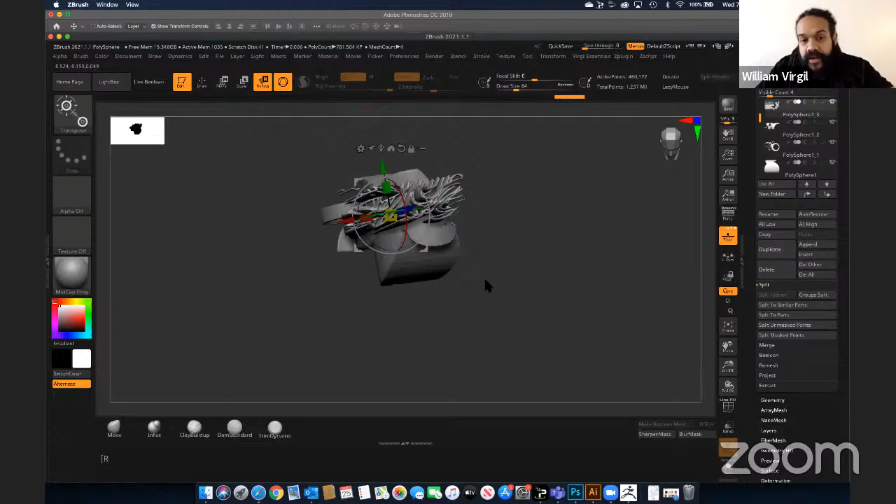Conversando con sus profesores, parte de lo que entendí que están tratando de hacer es enseñarles a ustedes a pensar de una manera donde puedan divertirse haciendo formas geométricas que son un poquito, no sé, no sobrenatural, esto no es nada alien, pero un poco no tan reconocibles como generalmente uno tiende a hacer cuando comienza a trabajar. Parte de los challenges que veo que los estudiantes tienen es...

¿Cómo yo comienzo a trabajar con algo que parece un poquito diferente? ¿Cómo puedo hacer algo que sea diferente? Muchas veces uno ve cosas y piensa, oh, eso es súper complicado, pero son técnicas que uno puede utilizar que hacen que las cosas se puedan hacer fácil y precisa.

Simplemente después puedes exportar. Vamos a suponer que te gusta esta geometría, puedes exportarla, vienes aquí arriba donde dice export, la que tienes seleccionada, das export, la grabas con el nombre que quieras. Y entonces eso puedes llevarlo a Rhino y escalarlo de acuerdo a las dimensiones que tu proyecto necesite. Y sí, eso creo que ya concluye mi pequeño tutorial.

Gracias, William. No, súper útil y súper interesante ver cómo se llega a una forma súper distinta, yo creo que hasta más rápido que hacer una composición de cubos en Rhino o en cualquier otro programa, ¿no? Sí.

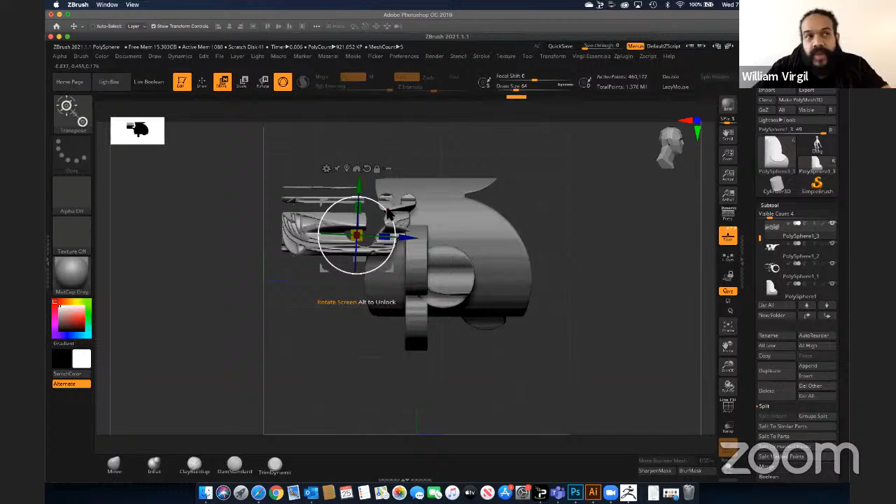Sí, bueno, pues 3D Coat y ZBrush pueden hacer casi las mismas cosas. Para mí en ZBrush tienes un poquito más de control cuando estás esculpiendo, y tienes un poquito más control para hacer operaciones de Boolean que son más fáciles.